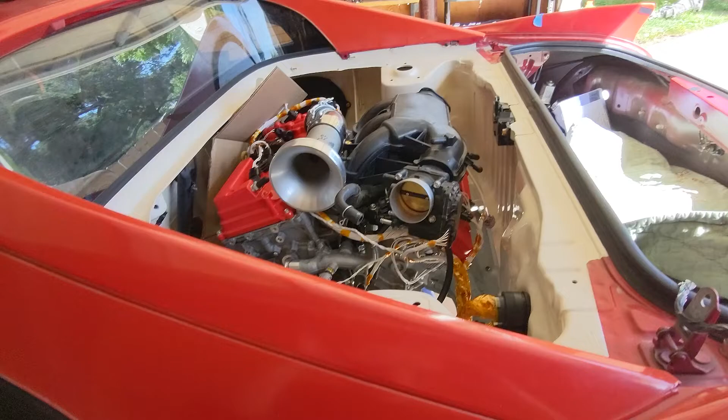You're gonna have to excuse my posh accent, but I'm currently dealing with COVID, so hopefully that doesn't annoy y'all.

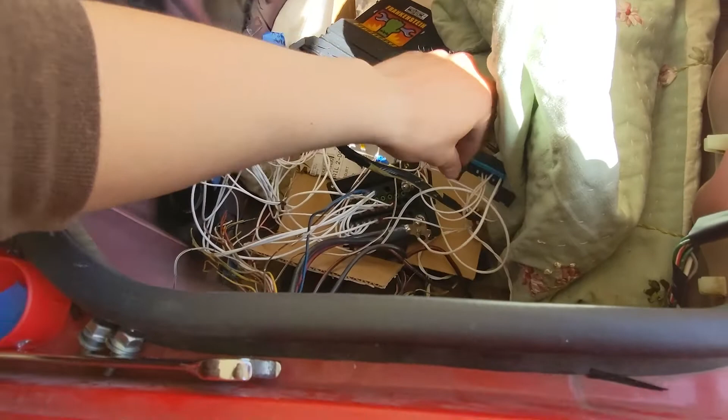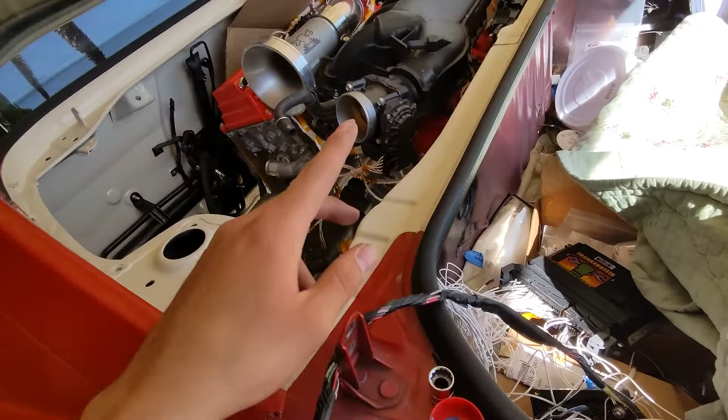But the car runs, wiring works. I had a little bit of diagnosing to do. Excuse the mess back here, but the issue I had was OBD2 wasn't working, and then I had missing power on the cam sensors, except the bank 2 inlet. That one, if you know the wiring diagrams, gets its own set of wiring, so everything else is shared. I also reversed the crank sensor pins, but other than that I didn't really have any other issues. I did miss one ground on the pin, but that didn't really cause any issues, so it seemed, at least.

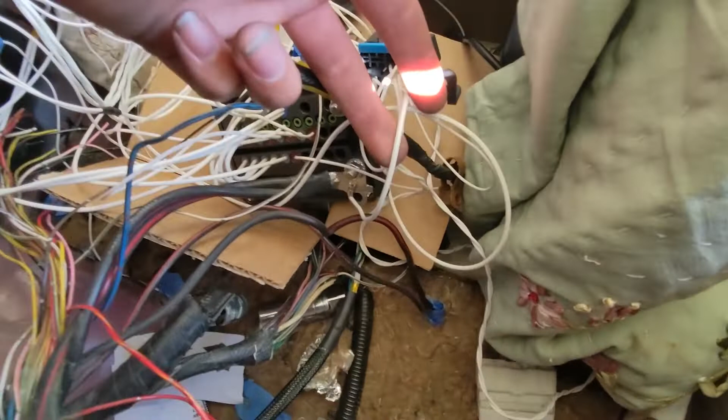The OBD2, I fixed the 12 volts. I had to give it a thicker cable off the main junction, like the main 12 volt. This cable, the big thick one there on the post, that's normally EA4, and that's normally what the alternator charges with on the stock wiring.

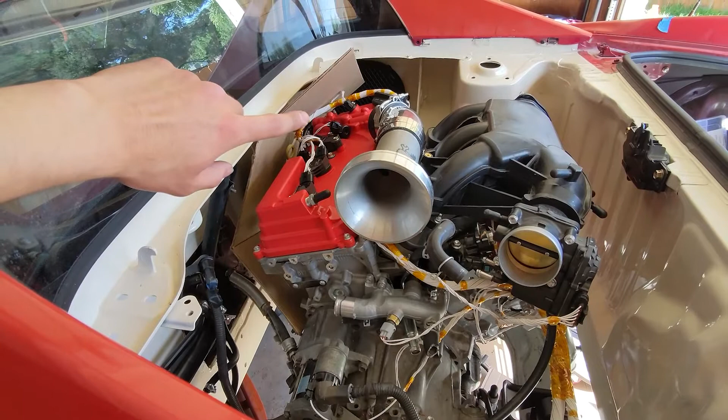I'm gonna be running a different setup. Mark at Frankenstein Motor Works said that on his race cars, I think probably on his Spider, he runs a fusible link from the alternator post to the starter post, so I'll probably just be doing that because I don't really want to run a big cable going through here.

So yeah, oh my god, there's a bee. Jesus, like the bumblebee things. Damn, those are freaky, man.

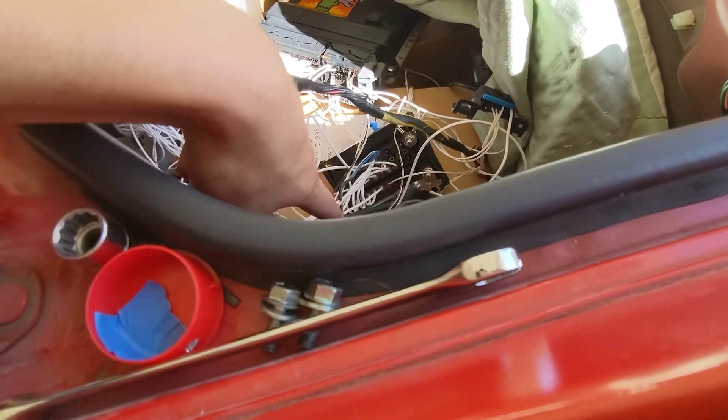Anyways, so I just repurposed the EA4. It's like two 8-gauge cables, and it has a 140 amp fuse in the kick panel, so I'm sure that can handle most of pretty much anything, because I think the max current draw this is going to be really getting is a total of like 60 amps or something like that. I'm not sure.

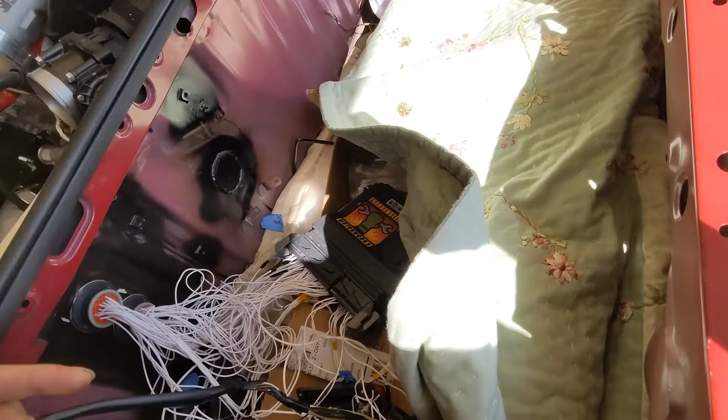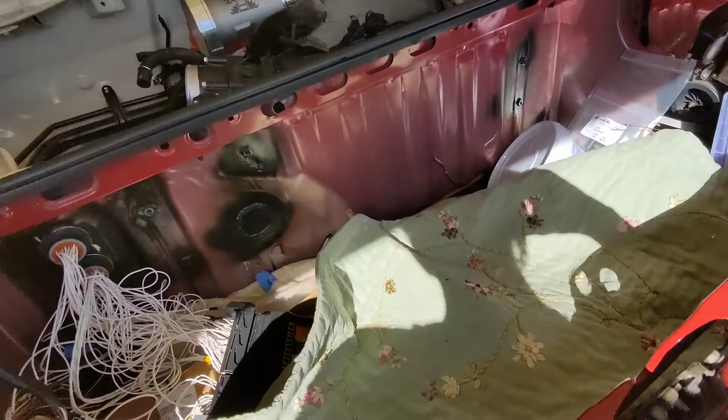I gotta add up the fuses, but pretty much now I have to clean this up, get the chassis integration going, because I only have like 2 or 3 connectors going, just like the actual starter signal, and then something else. That actually might be it. I have to hook up the coolant, all the cabin stuff and all that. But other than that, that's really about it.

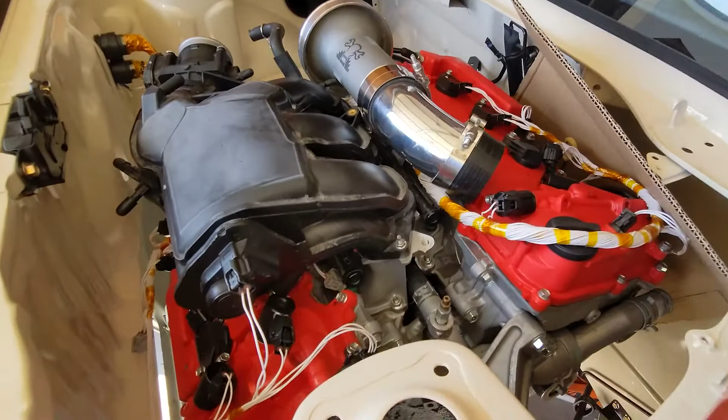I've started designing the exhaust, so we'll go into that in the CAD in a second. But I'm glad all this wiring worked, I'm glad it didn't fry anything. This is the first time I've ever really done any wiring harness creation, so I might insert a clip of it running.

I also started putting the interior back together. It's honestly pretty crazy seeing it back to normal here, because it's been stripped out for the past almost, I think, 6 months now. And then I got a fresh battery from Costco.

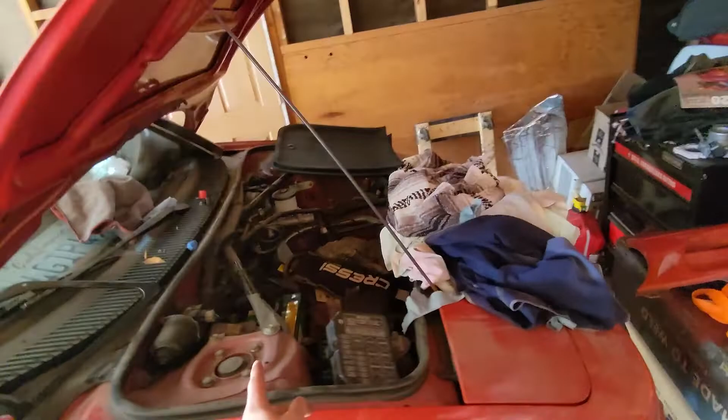Yeah, it's a trunk liner. My dumbass, I forgot to put the side vent stuff back on the driver's side. I'll show you here. So I'm gonna have to take apart the interior side on this stuff, but that's not too bad.

I'm pretty happy I actually went with the Frankenstein Motor Works ECU. I can't imagine - the issues I was having, if I had a standalone I guess I could have diagnosed it quicker, but just knowing that I can turn the key and it'll kind of turn on and figure out its own thing, it's pretty nice.

So that's nice. You can see here, I've been playing around with the drive-by-wire pedal. Man, that thing feels pretty cool. I mean, it feels better than the cable throttle for sure, so that's cool.

Let's see here, I don't really have anything else in here. We'll probably just jump into SolidWorks and I'll go over the exhaust design. And then after that, that'll probably be the end of this little episode. Although this one might be a really long one, so yeah, we'll jump into SolidWorks then.

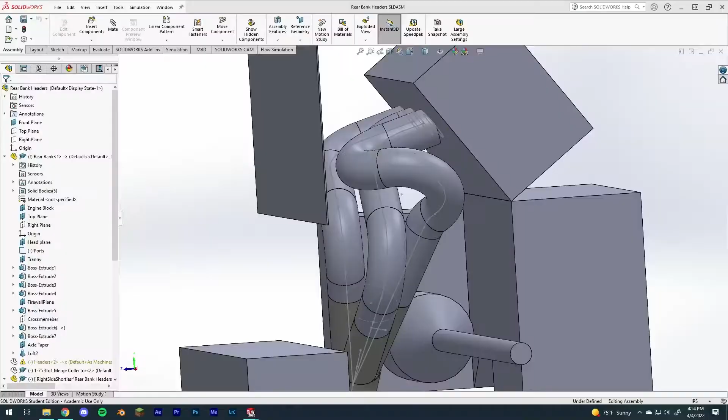Here I have the rear bank design, and then I have the front bank design. So I'll go over the rear bank, what I've got. This is the design I've kind of landed on for the rear bank.

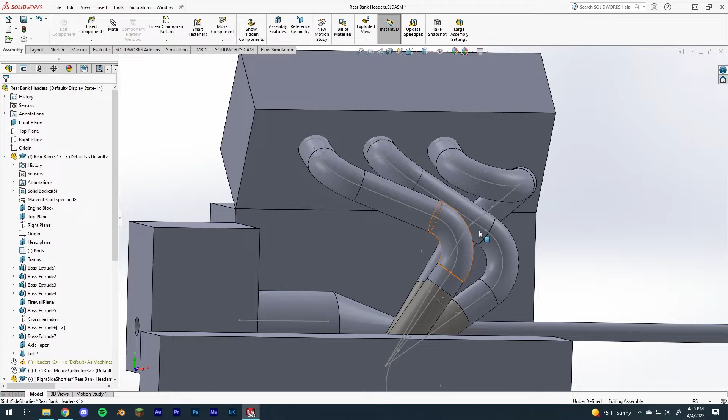I've gone through a bunch of different designs over the past month. I did have a design I made like a year ago, but that was based off nothing. I'll probably put up some screenshots of those different designs.

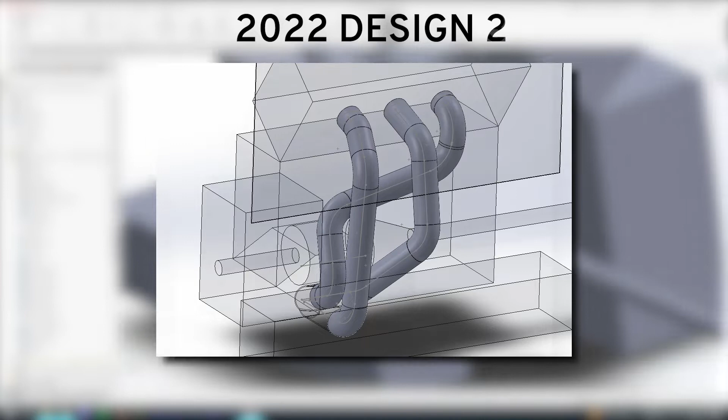I had some where the collector was underneath the axle here, some where the collector ended up in this area, and ones with the collector on the left side, and then one on the right side. This is kind of what I landed on.

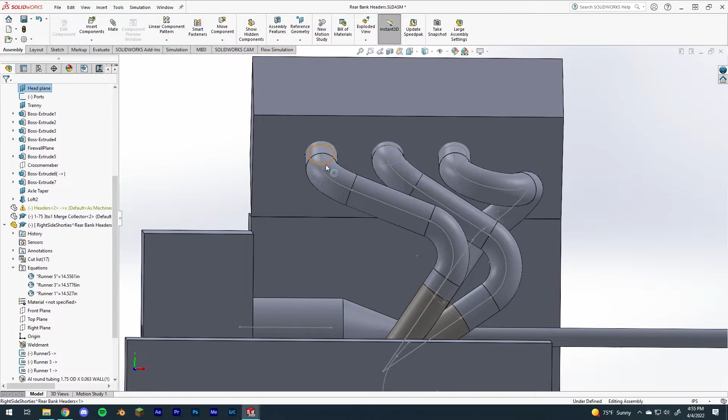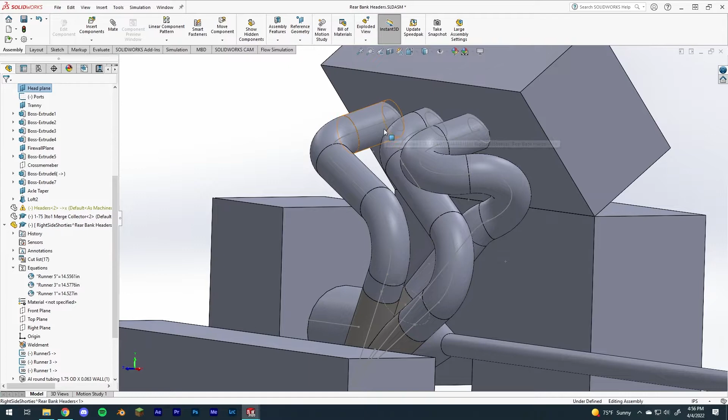I was targeting this for compactness, but also having a decent runner length. The header design right now that most people would be buying would be Mark's or Frankenstein Motor Works. His headers have like an 11.5 primary length, and I love the way those sound. But I figured that if I have something a little longer and also a bigger primary diameter, it might sound cooler. I don't know.

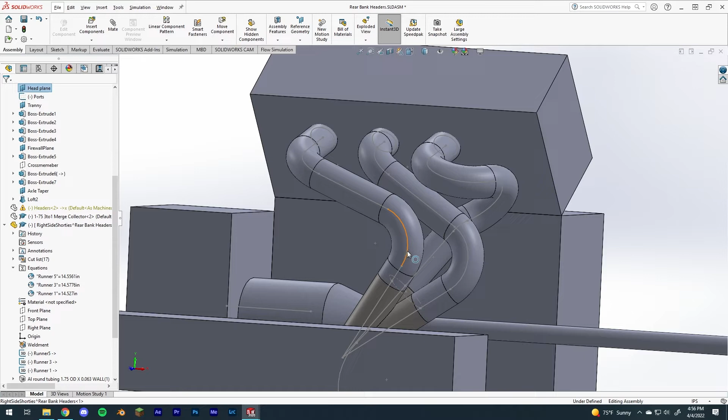I know some of the Lotus guys have header designs with a lot longer primary lengths, and those sound pretty good. I'm curious what this is, kind of the middle ground between the Lotus guys and what Mark has put out. So I'm curious what this will sound like, because these are 14.5 length primaries, plus another 1.5 inch into the collector before they actually merge. So it's about a 16-inch primary.

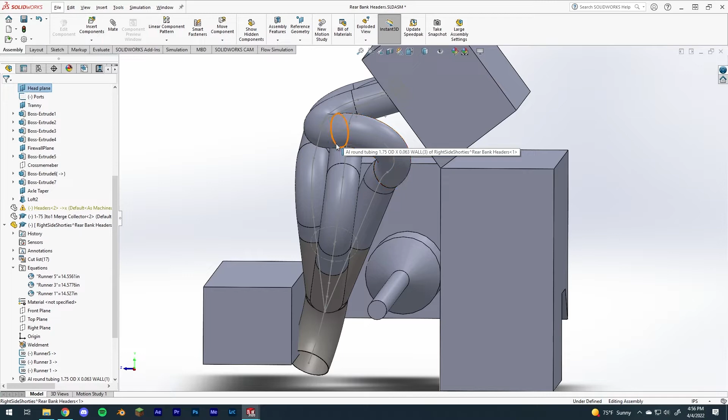So it's a decent-ish gain over Mark's, I guess. I'm also curious to see what that does for power, because I know 2Bular for Evora Exige stuff recommends on the forums a 1 3/4 inch primary size, but those motors are boosted too, so that might come into play. I'm not sure. I think their design is similar in length-ish, they might be shorter than this.

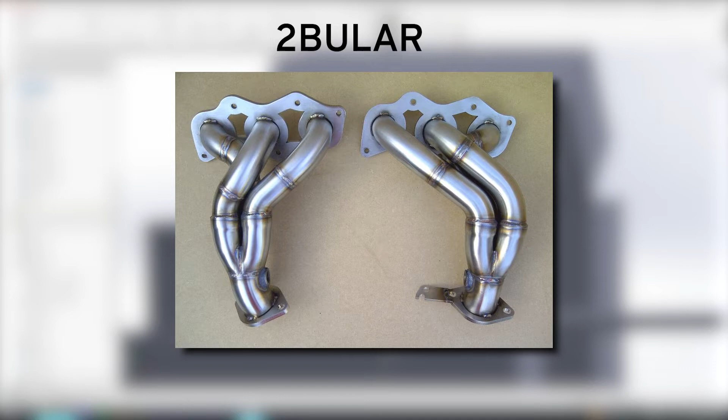There's also BOE Fab, and that was a design I was trying to replicate for a while, where it exited out the head, shot over to the left, went under the motor, and then merged. They had the merge collector right under the pan, and that would certainly be ideal.

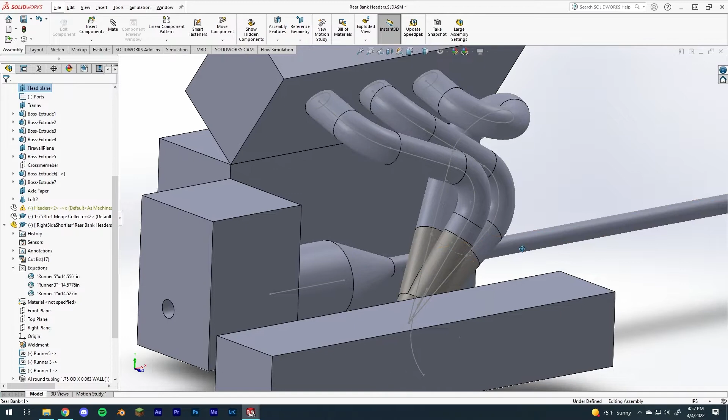But with the S54 axle, since I'm running the S54 for at least a while, the CV joint and all that stuff is on this left side, and fitting all that under here is so much packaging to worry about. Also, making the Y pipe down that direction might be a little trickier.

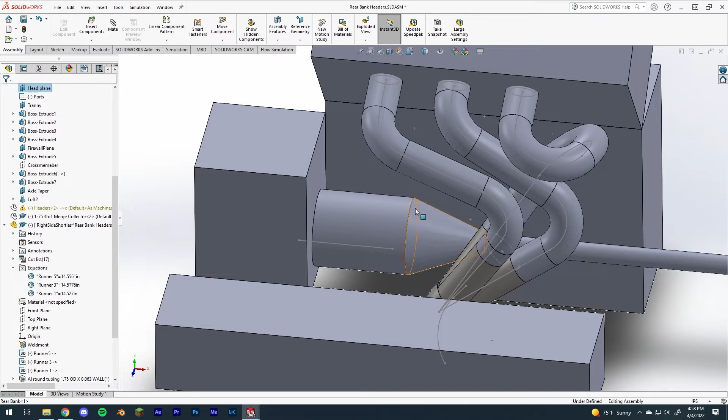I'm not really sure. Mark at Frankenstein Motor Works gave me the idea, he recommended shooting it off to the left here. So maybe I'm making a mistake making this one shoot over to the right, but we'll see.

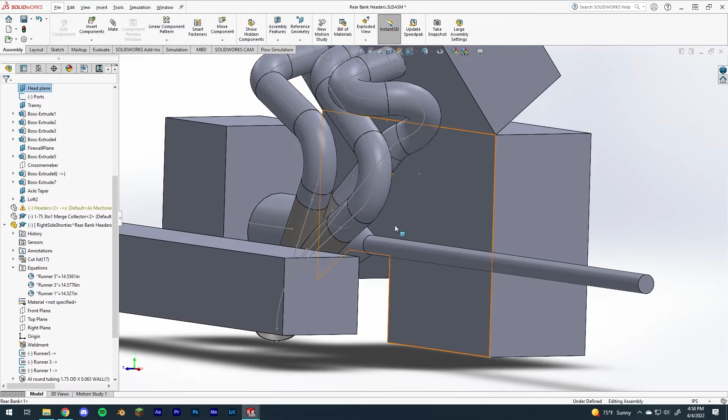I figured that if this design really doesn't hold up longevity-wise, the other side does, so I could probably redesign this one, because I do plan on doing an E153 swap, which uses the 2-piece axles. So I've tried to design this with that in mind, having that axle carrier bracket sit right here.

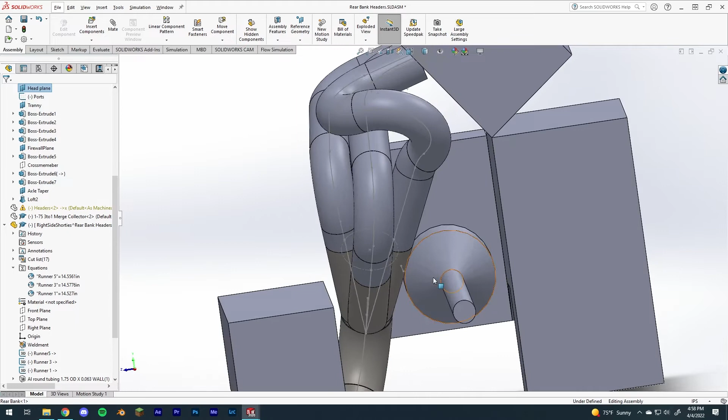I don't have an axle carrier bracket, so I don't really know what the clearances are. My best guess is that it shoots out like 4 inches from the block, which is right here, and it's rounded, so I figured if it clears this entire diameter of the CV joint, it should clear the axle carrier bracket. I don't know, we'll see with the test of time, I guess.

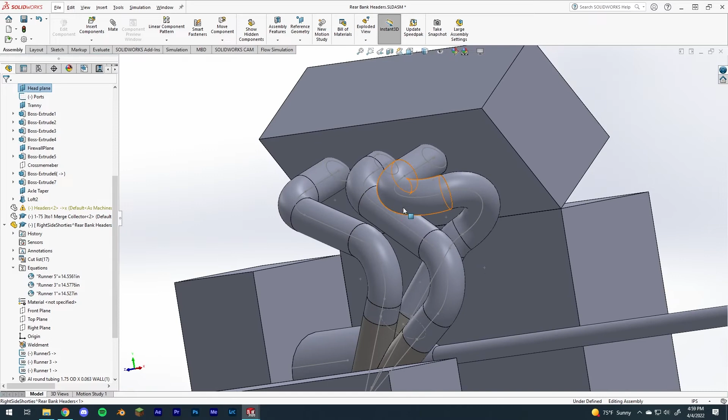But yeah, this design I think looks pretty slick too. The other design, the front bank, not so much, but in terms of clearance and stuff, I've got a decent amount.

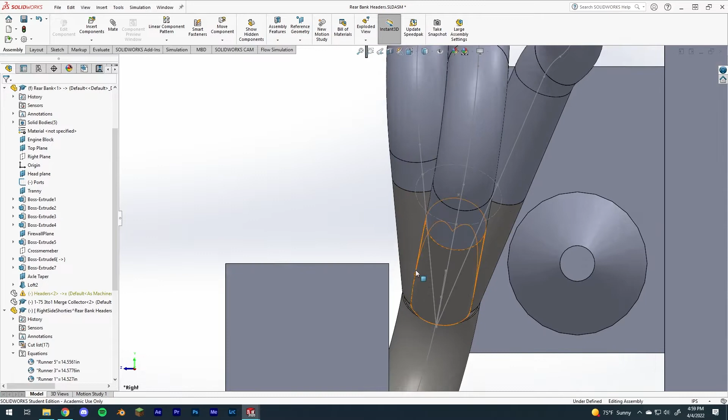Don't mind this gray pipe thing right here, that was just for a general idea of what the pipe's going to shoot out like. But I think the gap here and here is like 1/2 inch, and then here between the cross member it's like 1/4 inch. So it should be a good amount of clearance, because I don't think the motor is going to move around more than 1/4 inch.

Also, I'm not sure which way the motor torques. I think it torques counterclockwise, I could be wrong on that. I don't know that off the top of my head, but hopefully it's counterclockwise because that's the direction I would want it to go. But it probably goes back and forth.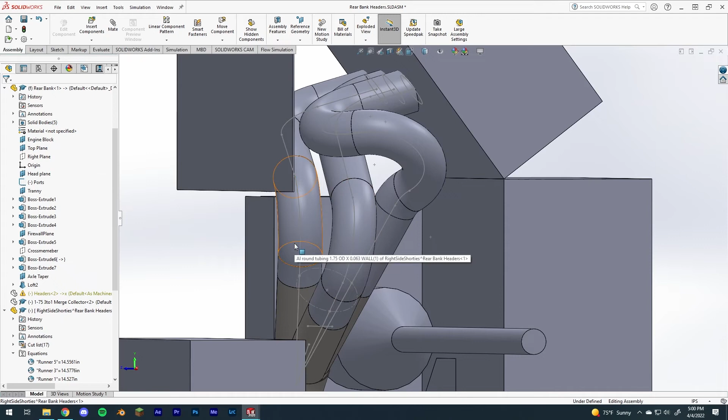But I doubt it moves more than 1/4 of an inch. I feel like at that point I need new motor mounts and stuff. So yeah, let me toggle off this firewall thing.

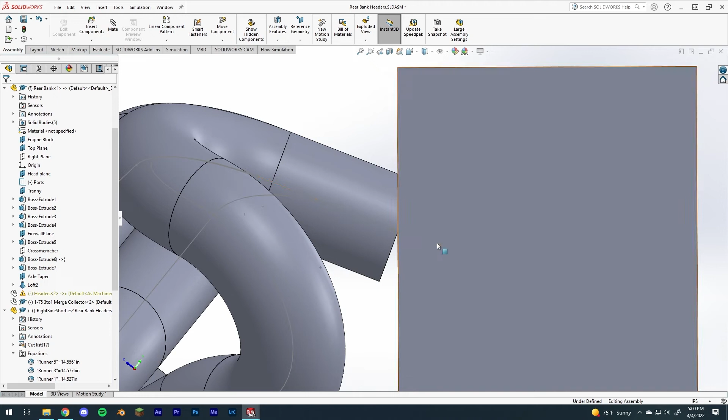Both designs have that 21-degree port angle exit thing that Mark figured out. If you look at his head analysis video where he cross-sectional cuts a 2GR head, he found out that the exhaust ports actually come out of the head not tangential with the plane of the flange, but at like a 21-degree angle. So instead of a header design that comes out tangential with the plane of the head, it's doing this sharp 21-degree angle straight out the port.

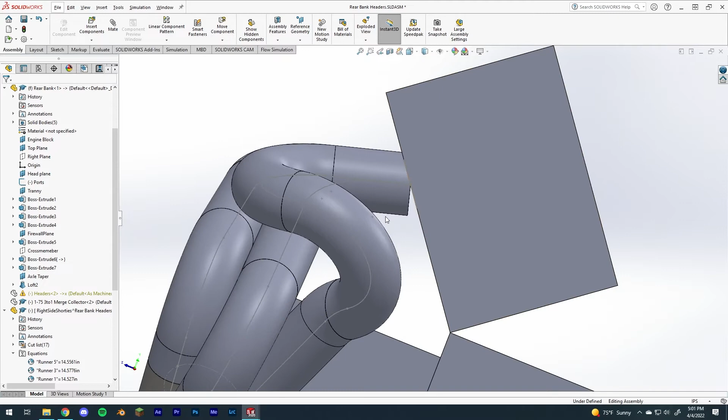Which I mean, it's probably not detrimental to flow, but with his new cast manifolds or headers, they have that 21-degree exit, and he did pick up almost like 10 foot-pounds of torque down low, which I'm not sure was due to the port exit. It probably was partially, but he also has a longer primary length, which I think is what I was mentioning earlier.

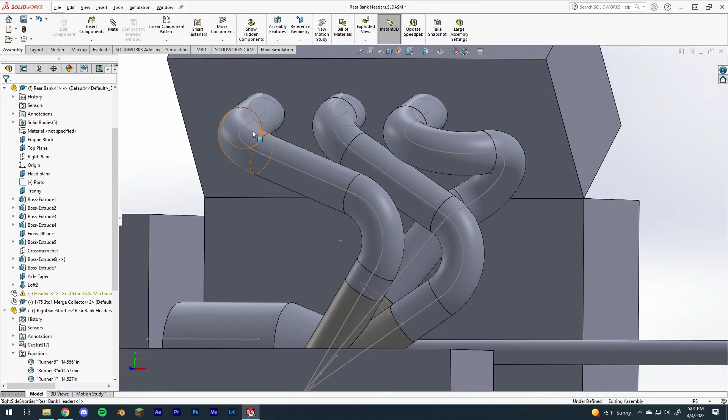But I'm also kind of curious what possible gains or losses I'll have with this longer runner. I'm more chasing the sound really, but we'll see. I'm sure I'm splitting hairs here, I'm sure it's not going to be anything too incredible.

So yeah, here's the front bank. This bank was super easy to design up. I mean, there's no axle, I don't have to worry about anything like that.

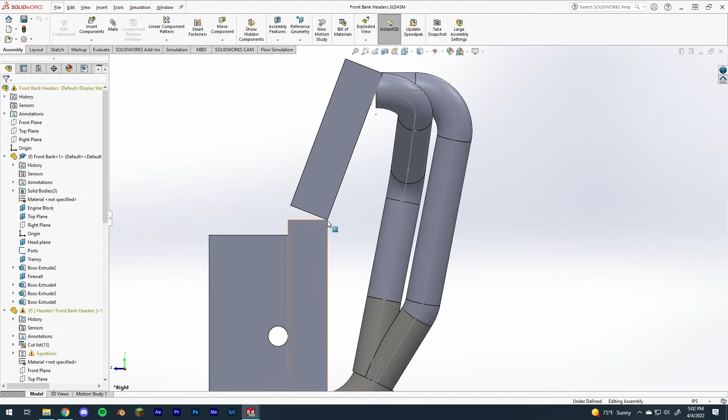It was pretty interesting seeing the design differences, because the front bank here, the head actually sits at a 21-degree angle between the block, versus the rear bank, which sits at like 37 degrees. It didn't occur to me at first, but once I started measuring stuff, I was like, oh yeah, I have much more vertical room here with the front bank versus the rear, which is why this was all kind of looped up and snaked.

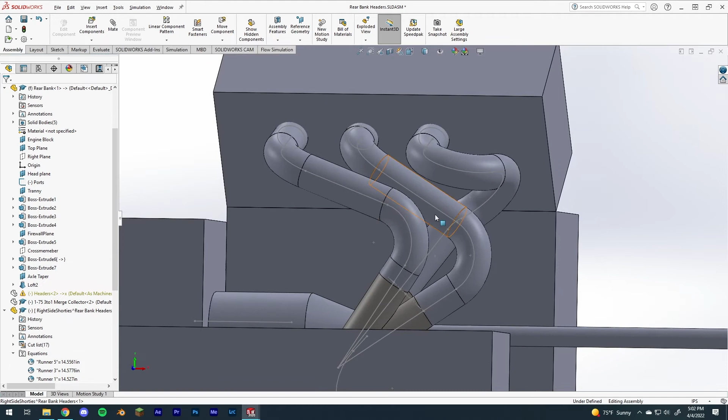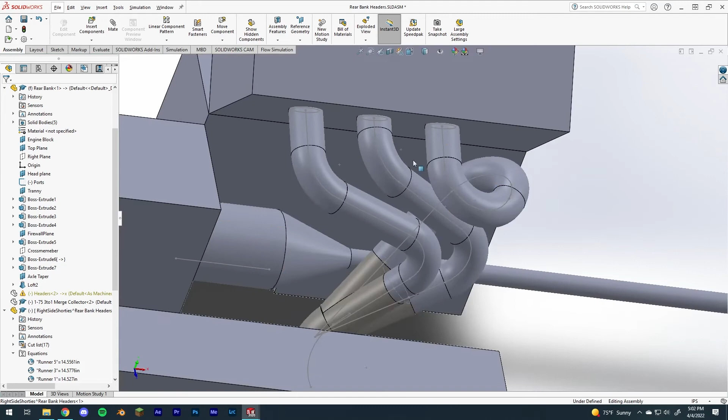This design was kind of sort of based off a 911 or Cayman header design, where it's not entirely the same, but it looks sort of like this, where their ports come out like vertical-ish, and then they have to do this 180 to get it heading back to the motor, but also having a primary length that's decent. So that's sort of what I based it off of, ish.

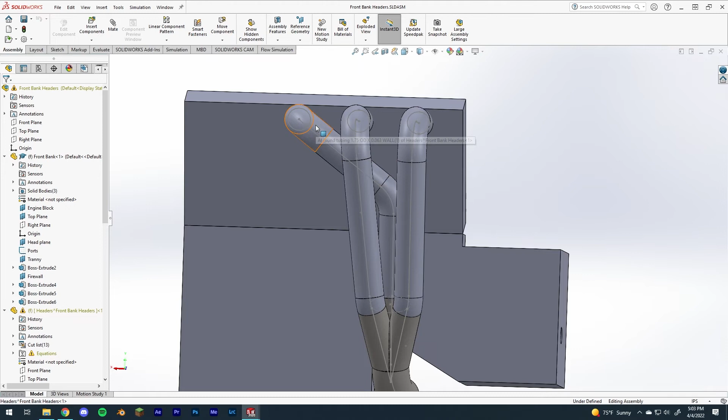I also based it off of just marks and stuff. But yeah, this design is also sort of based off Frankenstein Motorworks' old design, his tubular headers. This is kind of like a mirrored version of his old tubular headers, mirrored and also lengthened.

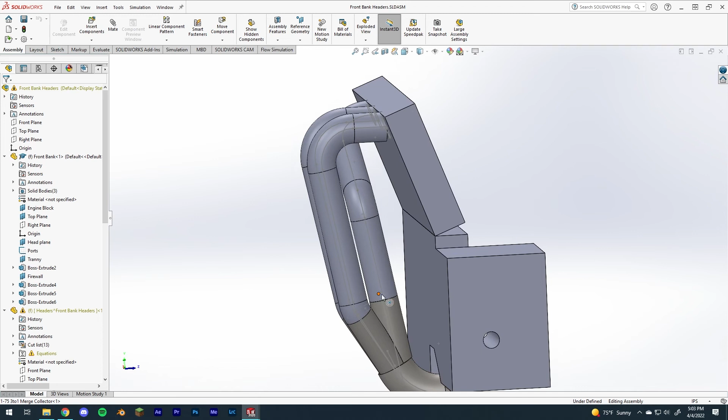I think I've seen another design similar to this, with the two closest ports shooting parallel down, and this farther port going to the one collector entrance closer to the block. I don't know how to describe it, but that works out to having equal length and stuff, because these are all like...

14.5 inches, and then plus the 1.5, I think it's like 1.71 inches or something like that. So yeah, this is 16-inch primaries.

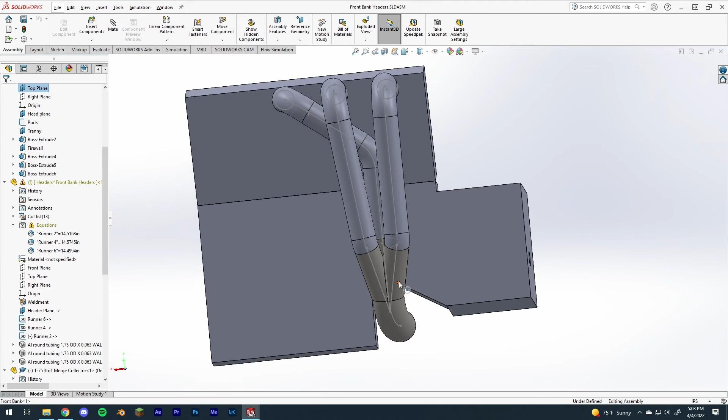So hopefully I modeled the block and stuff right, because I would like having this Y pipe exit or Y pipe beginning. I hope that doesn't impose too much of a challenge for me to make.

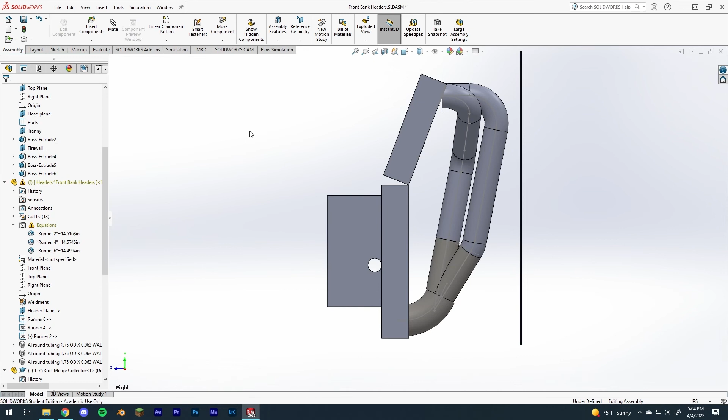Yeah, what else is there? I mean, that's pretty much it about the designs, really. There's a clearance issue with this, with the exhaust shield in the way. But this is gonna be fine in terms of clearance, I don't think this is gonna hit anything. I definitely think the rear bank is gonna have a much higher chance of hitting something.

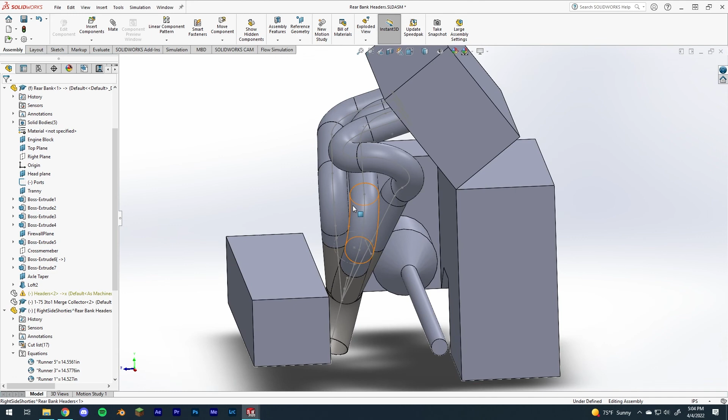So yeah, I'll see you guys in the next video, where I'm hopefully converting these into a real life thing and not just a digital recreation, because some of these bends are like 101.03 degree bends. So I'm not sure exactly how I'll go about making that in real life, but I'll do my best.